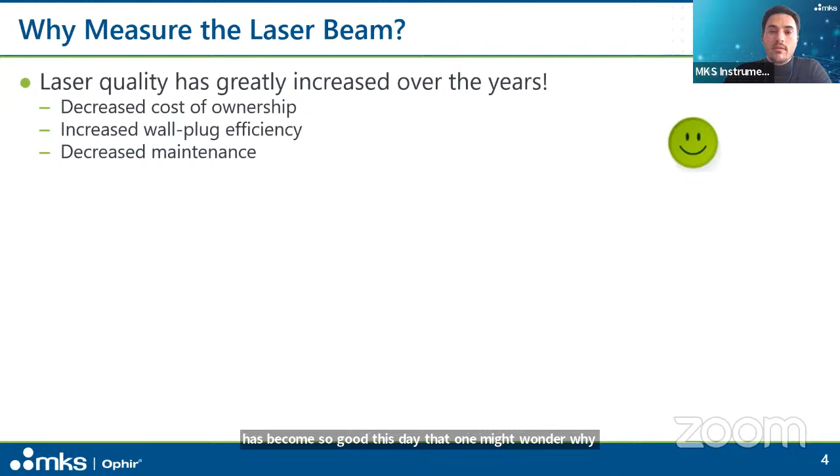So the very first question is, why should we measure laser in the first place? The quality of lasers has become so good these days that one might wonder why it is necessary to control them at all. But they are still made of physical matter, which means that any laser is only as good as its beam delivery system—components wear out and get dirty over time, and as a result performance suffers. We have power decreases, focus size will vary, and focus position will change. In the end, time is wasted, scrap is produced, and money is lost.

There is a direct link between the quality of the laser and the cost of the produced part, linking it to the title of the presentation—reducing the price per weld. First of all, a good laser will increase quality, with lower risk of reject, higher reproducibility, greater traceability, and better documentation.

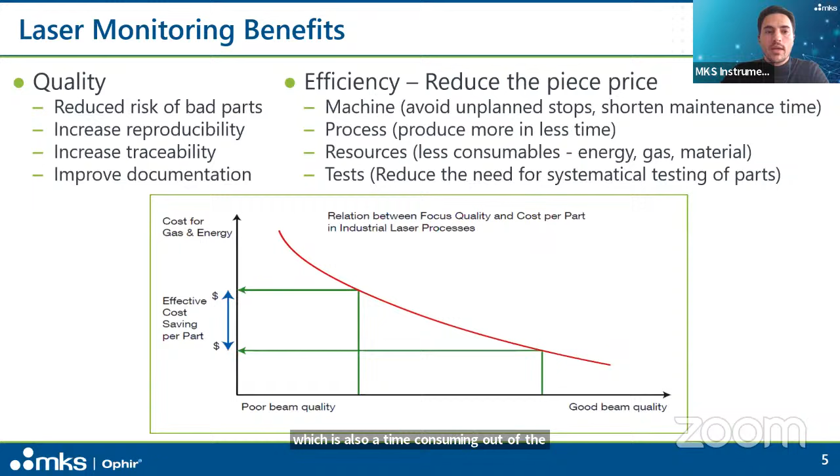But efficiency will also increase. Breakdowns are avoided, or you can predict your maintenance and reduce maintenance time. You can produce more in less time. You will consume less energy, less gas, less material, and finally spend less time on testing, which is also a time-consuming part of the process. If you know that your process is right from the laser point of view, you can reduce the testing.

There are a whole variety of laser parameters that can be controlled, but it's primarily about the process. Which process parameter is the most important? The power density at the workpiece, the power per area. These are the two main components, the power and the beam area, that we address with the measurement technology. The power density can be affected by degradation of laser components, and if the power degrades over time, the power density also automatically decreases.

Let's see different power measurement solutions we have to check the power. There are many types of power sensor. The first do not require any active cooling, they are passively cooled, and come in different shapes and sizes depending on the power to be measured and the interface used. Then there are air or water-cooled ones, which allow you to measure more power or for longer duration. Among these families, there are portable standalone solutions you can operate with battery, needing no separate device, or solutions designed to be integrated on production lines to run 24/7, communicating with Profinet or whatever. The power variation was the easy part, so to say.

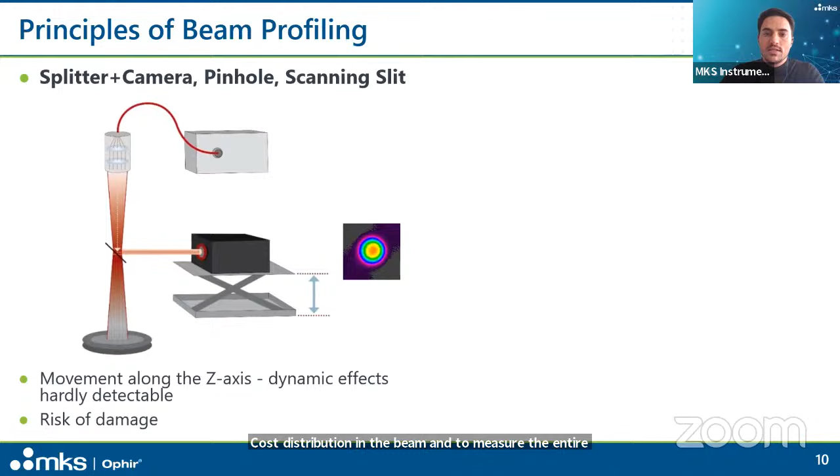So to measure this parameter, we use what is called beam diagnostic or beam profiling. There are two approaches. The first option is a beam splitter and camera system, or a slit-based or pinhole system, which captures individual cross-sections of the beam. Since the laser must be in contact with the instrument, the laser power is limited, otherwise you will damage the measurement instrument. So it provides a detailed profile of the power distribution in the beam. To measure the entire beam caustic, the measurement system must be moved along the z-axis and multiple cross-sections measured. This takes time, so dynamic effects such as focus shift are not detectable.

The second option is a camera that captures the Rayleigh scattering of the laser beam from the side. In this case, we're not shooting the laser onto the detector; the detector is looking at the laser from the side, and we call it beam watch. It is a non-contact measurement, so there is no upper power limit, you cannot damage anything. The whole beam caustic is captured at once and can be followed live, so all parameters can be measured immediately in real time, and you can track the focus shift.

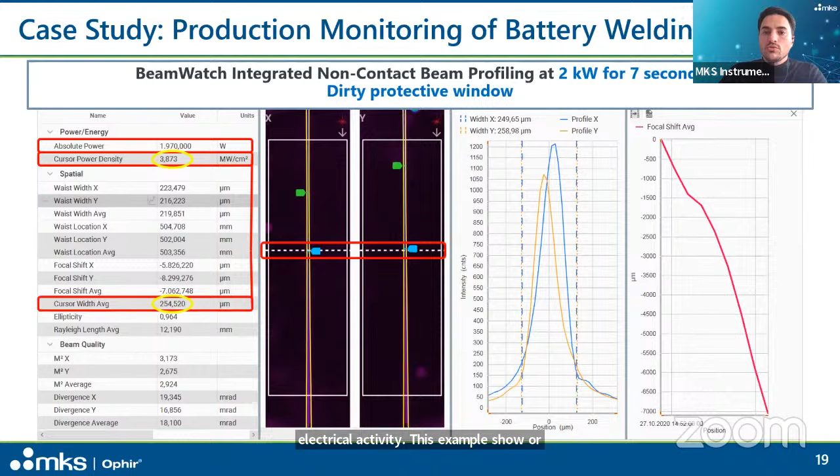So this example shows how predictively monitoring the focus shift allows us to detect the defect before it appears.

BeamWatch integrated measures the laser after each produced part. The measurement takes only a few seconds and is performed during loading and unloading of the part, so it is cycle-time neutral. It's not taking production time.

Each time, a pass-fail output is generated, so you can define the parameters for the pass-fail, and then you have an okay, not okay, and a detailed report is archived.

And finally, the ability to recognize a trend is used for predictive maintenance, and the protective window is cleaned or replaced before producing bad parts.

What you see here is like a chainsaw, or the blade of a saw, these green dots. Every time the protective glass was replaced, you can see that the focus shift goes back down. When it's going up, that means it's getting worse, smaller focus quality. Then with time, it grows as the protective glass gets dirty, and then every time it's changed. The limit here was fixed at 3 millimeters as an acceptable value, and every time it was approaching 3 millimeters, it was changed.

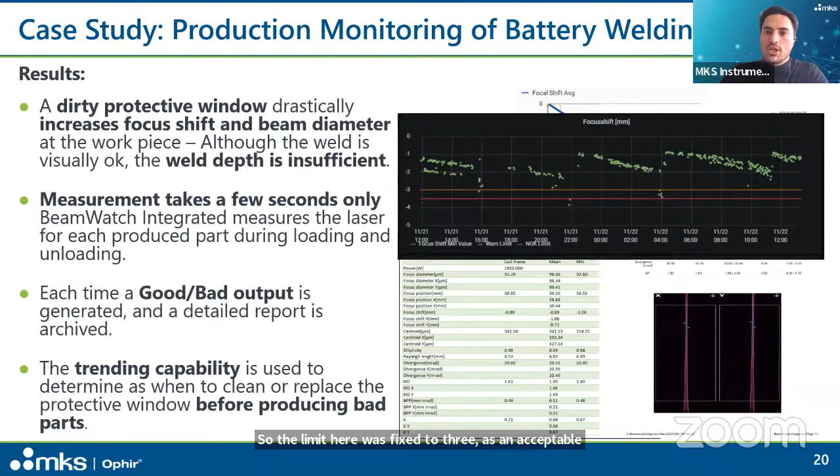So as a conclusion, we have seen that it is very important to know and maintain the laser parameters. We have also seen that there are specialized measurement solutions that can be used to quickly measure the most critical parameters, especially dynamic parameters such as the focus shift. And finally, we believe that the more regularly the machines are checked, the higher the quality and the productivity, which will help you reduce the price per weld.

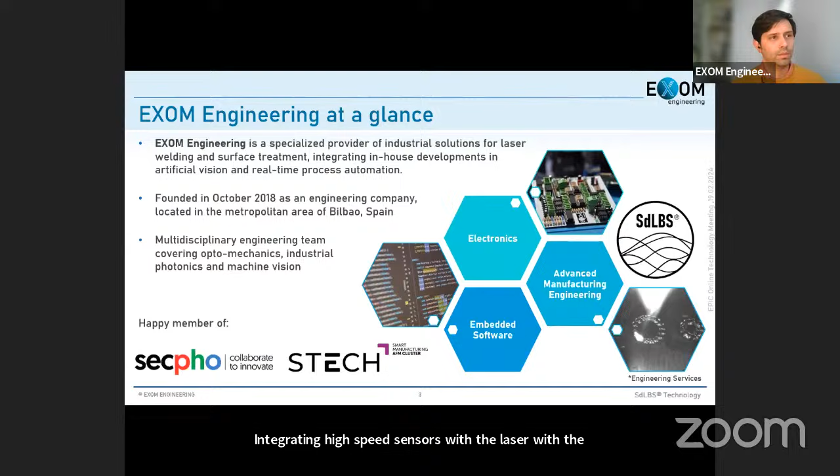As I said before, we found EXOM Engineering already 5 years ago. It was an interesting approach for us because we were dealing before, in other companies, with integrating sensors and always having some kind of issues and challenges integrating high-speed sensors with the laser, with the machine. And we said we would like to make it a little bit different. We would like to have a solution so that we are dealing with these three worlds together.

So electronics, we develop our own electronics at EXOM Engineering. We develop the embedded software that is running on these electronics, and we apply this mainly to laser applications, but not only. Right now we've been developing from this initial status of control electronics to optics, and we're going into a bigger application area where we're offering complete solutions for laser welding.

So for those of you not familiar with wobble laser welding, how does this work? Basically, we just move the beam on the surface using mirrors. In many cases we use two mirrors, but there's also a case where we use one mirror to move it in both directions. So we are somehow wobbling - the word itself is like going from one side to the other, making different geometries.

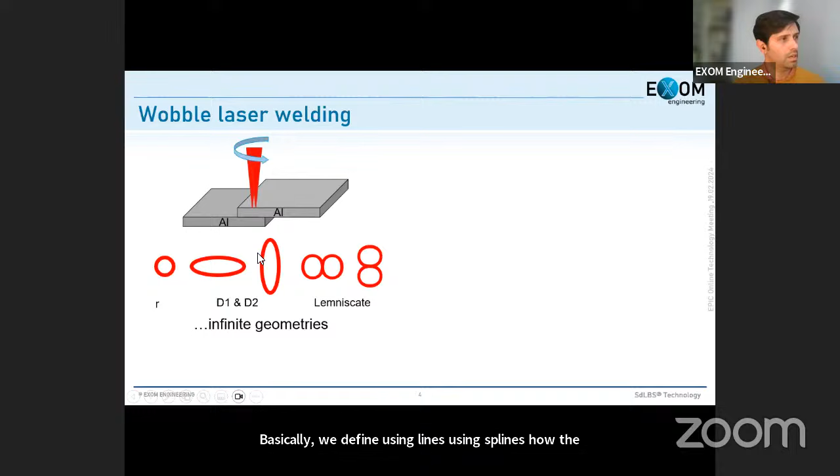These geometries are usually described as a circle. Circles are the most used wobble technology or wobble strategy. But we can also do ellipses, lemniscates, and basically infinite geometries. We define, using lines and splines, how the laser is going to move, and at the end we have a wobble strategy. How does this look on the surface?

This is an example of a conduction welding application using aluminum. Basically what we do here is an ellipse, with a frequency higher than 200 hertz. What we try to do is move really fast so that we're reducing the dynamic at the same point.

So we're just moving and moving around this area, so that at the end it's important to define the wobble type we're going to use for the technology and application. But not only the wobble type - it's also important to keep an eye on the frequency, how fast we're repeating this movement on the surface. And one interesting approach we're following is the energy, which is the power times the time that we stay at the same point.

So it's not only possible to change the figure of how we are wobbling, but we can also change the different speeds and powers at different segments over this figure.

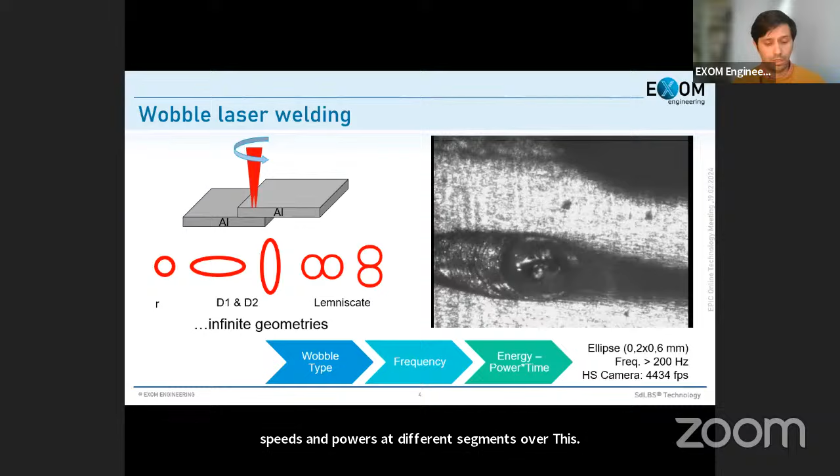As I said before, I brought today just an application case, just as motivation. Basically, if you're familiar with laser welding or welding T-joints, you have a really good definition of the deep penetration throat, how deep you need to go into the material, but also the nominal throat thickness. This is just an example - I put some numbers on the picture so we have an example of how we define this, or how our customers define it. This is work we've been doing together with the company Alpha Laser.

Basically, if we go to an application where we don't use a wobble, let's say we're going to try to weld these two metal sheets - this is an inox material. If we have the right amount of energy, the right laser power, exactly the right diameter, focal length, and so on, we're going to go deep enough, but we're not going to have exactly the throat geometry our customers are asking about. So this is just an example of how wobbling could be an enabler for future applications in structural welding.

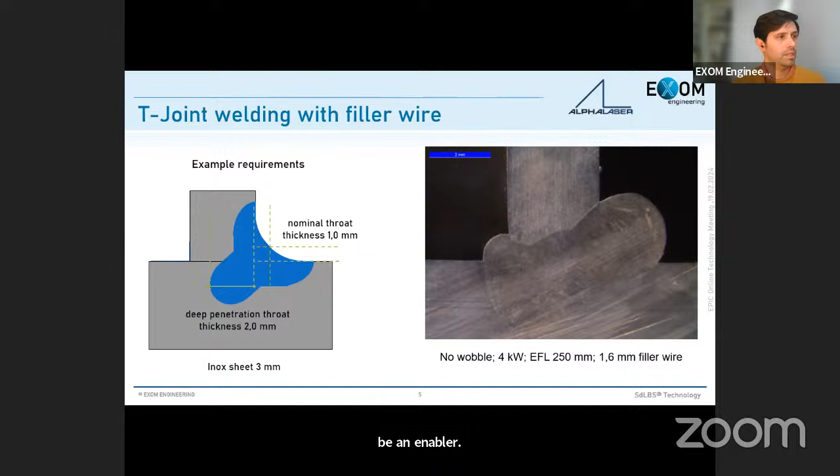Before we start doing this, we of course analyze using cameras. This is just a video of how we use a wobble strategy - this is a lemniscate, the most typical strategy in these cases. We just wobble, and once we wobble, we take further steps and analyze how deep, which kind of laser power we need, the width, and so on, and how we don't affect the surrounding areas of the T-joint, so that at the end we're able to have an acceptable deep penetration, an acceptable throat geometry, and also an acceptable distance over the surface.

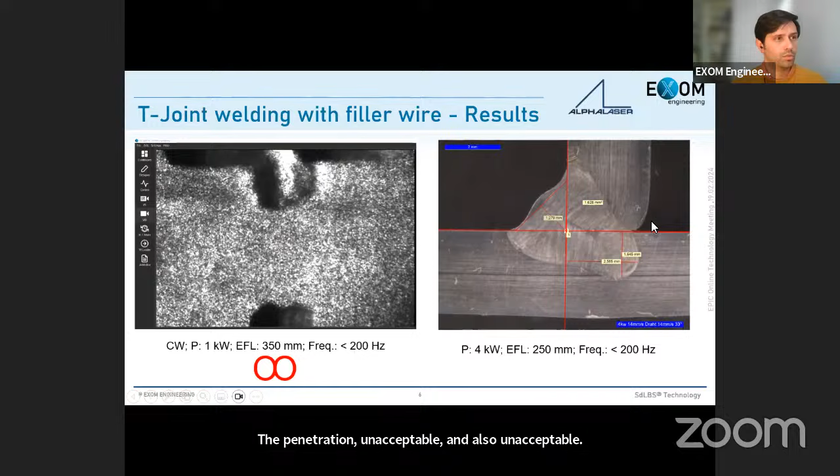So let's think about this - of course it's going to vary depending on which angle we're welding at. This is a welding strategy done with a robotic arm, so it's also important to have access. But basically what we see here is a well-defined laser weld joint, so we can say this is working well. But it's important to understand that the stability of this result depends, as I said before, not only on the frequency, but also on keeping this wobble strategy along the path, and keeping the position relative to the filler wire exactly at the position we had at the beginning.

Also related to the presentation before, this position, how deep and the effective focal length is here. If we extrapolate to the X and Y position of the laser beam, it is important as well to keep this position. So in our laboratory setup, we have integrated two cameras.

As I said before, basically we use in this setup two mirrors, a galvo scanning mirror, or two galvo scanning mirrors, and we're integrating a thermal camera in the upper part. So when we have the reflection of the energy, the thermal image is going back to the camera. We see on axis, sharing the same path of the laser beam and the thermal camera, and we do it as well for the visual camera.

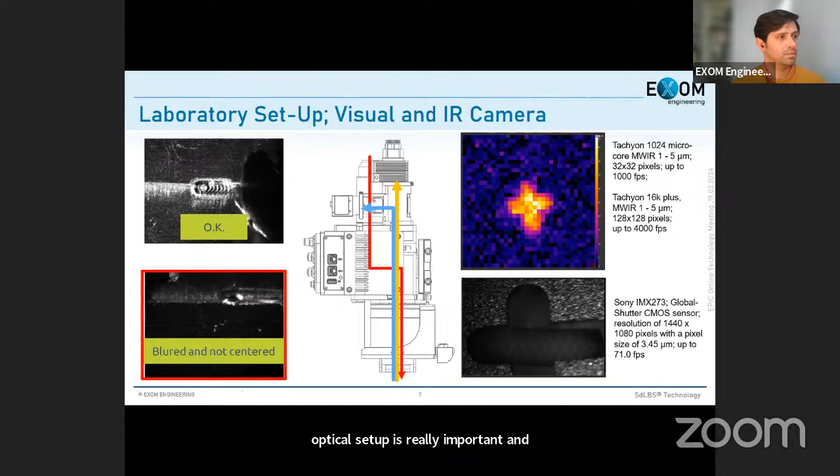One of the challenges that we had before during this integration is how the cameras are centered, how the different wavelengths, how the different lens and so on are giving us an image that is really okay for doing this analysis. So it's not only important to have the possibility to process all this information, but the optical setup is really important and is decisive for having a good monitoring solution.

So this is another work we did, also in a project together with the Research Institute LORTEK, in which we said we would like to be able to identify 5 kinds of wobbles using convolutional neural networks, using deep learning technologies, which are state of the art right now.

Because we're able to integrate cameras, we would like to identify how these different wobbles are performing on the surface. So we defined 5 of them: a small circle with a diameter of 0.5 millimeter, a bigger circle with a diameter of 1 millimeter, an ellipse in one direction, and the same but 90 degrees to the direction of the machine speed, and then the well-known lemniscate or infinite strategy.

In this case, it's important to understand that we're not using exactly the same amount of power for all of them, but we are using exactly the same feed rate, and we're trying to keep as well the frequency for all of them.

So I would like to share some of the results. The monitoring approach in this case was done using YOLO v8. We took the images, identified the images, labeled the images. At the end there were more than 1,000 images, and then we tried to understand if the system is able to identify them, with the right amount, with the right optical setup, because we need to have external illumination and filtering.

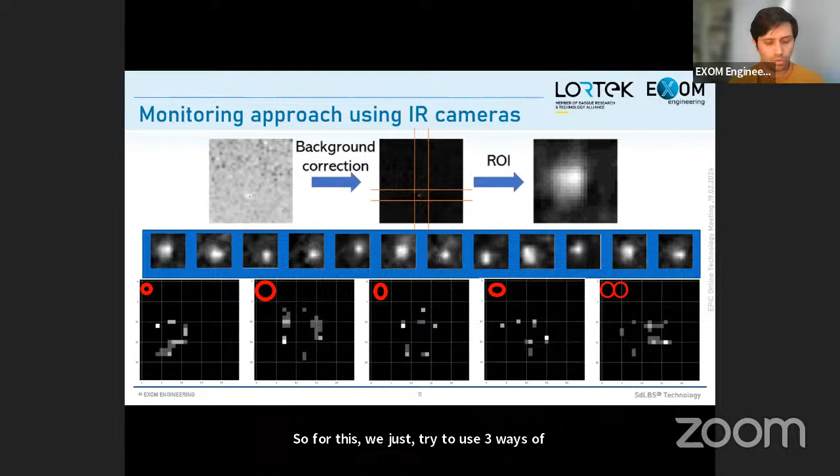So for this, we tried 3 ways of using deep neural networks. In this case, I present the comparison of 3 results. Basically, in these 3 approaches, we use a convolutional 2D network.

But we said no, we would like to go even to a better result, and in this case we went to the second approach and the third approach. Here we're using convolutional long short-term memories in 2D.

Basically, we're introducing in both of them not only the spatial resolution but also the temporal resolution, so that the system takes into account the image before. It's more or less similar to the first approach, but here we're making an image from the stack of images, taking every picture or frame as it comes from the camera.

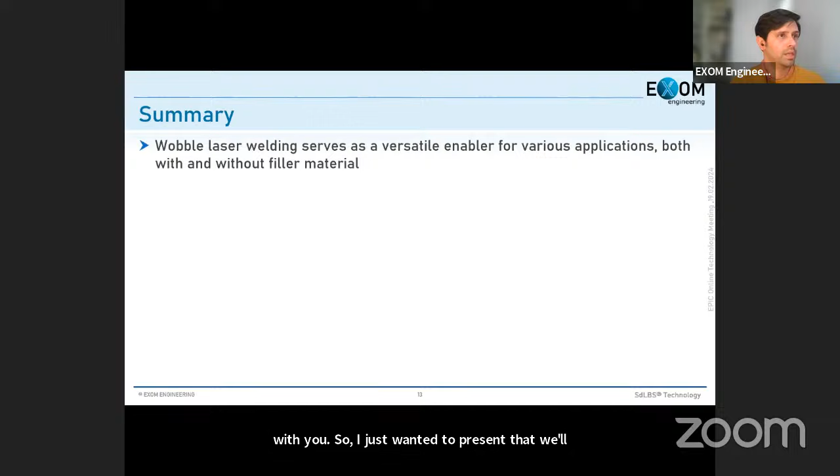So this was my presentation, what I wanted to share with you. I wanted to present that wobble laser welding serves as an enabler for various applications using filler material, and also without using filler material. For us, it's really important to keep the constancy of the wobble beam—not only thinking about how powerful the laser is and whether we are at the focal point, but also whether we are doing exactly the strategy we defined.

As I said before, using visual cameras requires a little bit more extra setup, illumination, and filtering. But in our eyes, it really represents a solution compared to more complex sensor integrations. Of course, if we can use both, seeing in different wavelengths, that's really positive. For us, the most robust application is using infrared cameras, because we have a higher dynamic range and a high-speed solution up to 4,000 frames per second, which is really positive in our eyes.

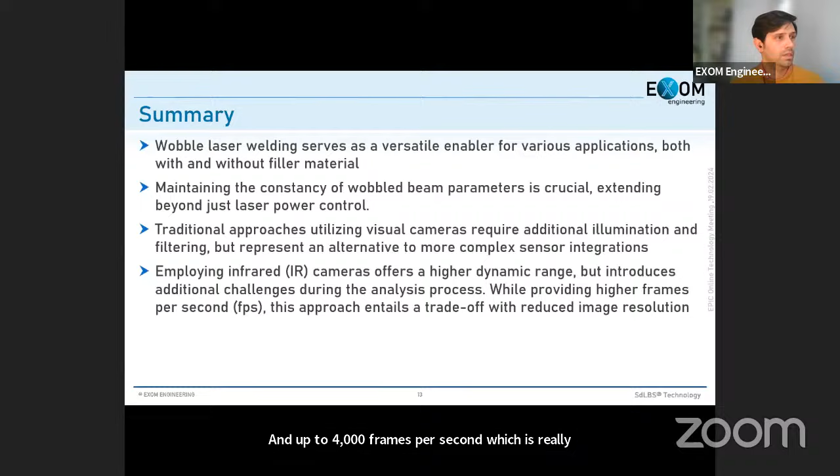I can start with a question about the power you use in the different shapes of the wobble, because at the end one circle is small, the other is slightly bigger. In the infinity, you pass a couple of times for the same area, and I see that the powers are more or less the same, slightly different. Will it make sense to evaluate different powers, or are the powers you choose optimized for these shapes?

Exactly. So the power that we use is for welding results that should be working well. We just did the preliminary identification of the parameters, and we came to the conclusion that this power is exactly the necessary power for welding both sheets. In the case of the aluminum sheet, exactly.

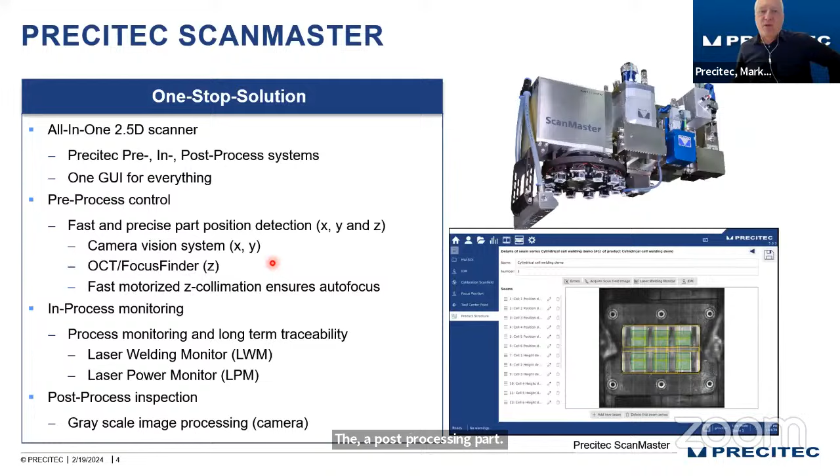So this, what we call a one-stop solution, is an all-in-one 2.5D scanner. You will see later on why it's called 2.5D. It comprises all Precitec sensor technology for pre, in, and post-processing. We try to compress all the user interfaces into one graphical surface, so from that GUI you can control the camera, you can control the OCT part, you can control the LWM part, and you can also control the post-processing part.

So why do we call that a one-stop solution, or why does it comprise a lot of Precitec knowledge? We are using an industrial scanner, which is not a Precitec scanner. We are not famous for scanners.

That's why we are using one of the most robust scanner technologies on the market. But we are famous for laser cutting.

And so one part of the Scan Master is the upper part of the Precitec ProCutter, which is the motorized collimator. So this is the 0.5, so the half D, which we can put on top of the 2D scanner. So that's why it's 2.5D.

So we are able to move the collimation lens, and that's why we are able to correct the focus spot position in Z. A lot of knowledge of the Weld Master is in the Scan Master, which is mostly also the knowledge on coating.

So as you may know, all the sensor technologies need a special window, a spectral window, to perform best. And this is a question of coating, and that's why we also have good contacts to famous coating companies all over Europe, which can supply us the best windows and the best beam splitters in order to have the best performance on all the sensors.

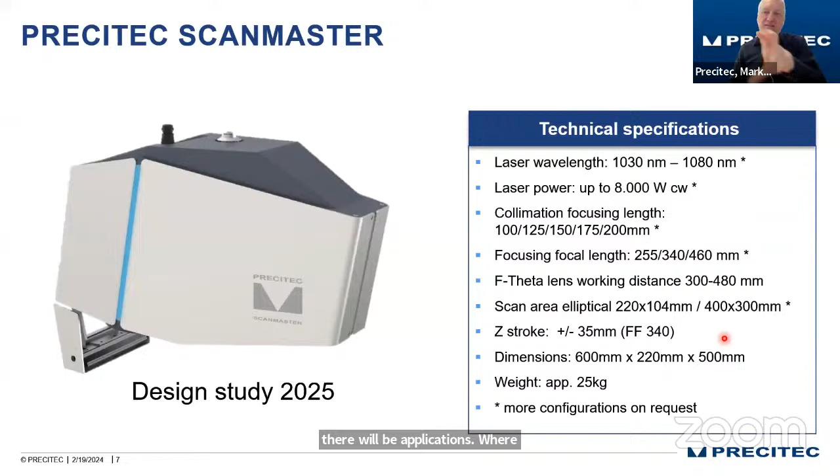Different focusing, different collimation lens, different F-theta lenses, whatever will be important for the process. The Z stroke here is the one which we can guarantee with the motorized collimator. You see the dimensions and the weights, and for sure there will be applications where these numbers will not fit, and we will have different configurations on a request.

But what is of main importance these days is that we are also able to apply beam shaping. And that's why we are partnering with Cailabs. You may have seen that on the Photonics West and on LinkedIn, parallel to Photonics West.

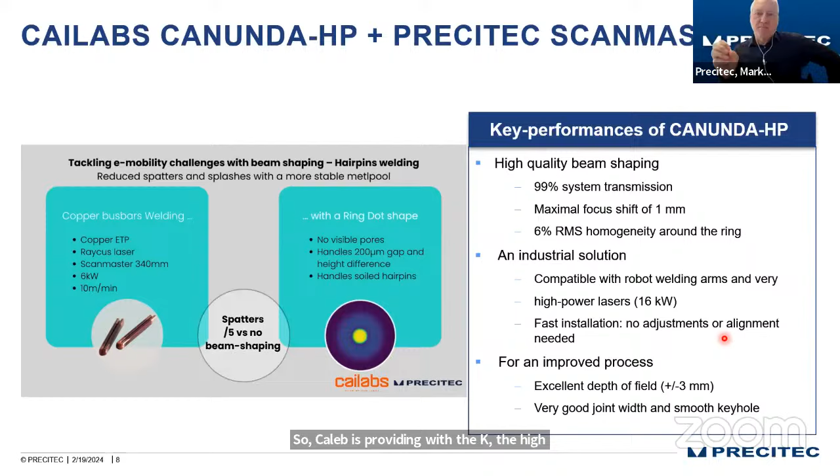So Cailabs is providing with the Canunda high power system a very high quality beam shaping solution, 99% system transmission, because it's based on reflective optics.

We benefit on the really less focus shift, on the high quality of the focus of the beam shape. That's why in all the work we have done in the past, in the last 2 years on industrial level, and before that on R&D level.

in European projects, we have seen that it's a fully industrial solution going up to 16 kilowatts, which is important for us when it comes to extreme high power applications. And one of the best things of that solution is the excellent depth of field, which we haven't seen with other solutions these days.

So let's go to one of the applications where we apply the Scan Master, which is a cell contacting application, one of the famous applications in e-mobility. There are some limitations in that process which we have to cover, and we can apply all the sensor parts.

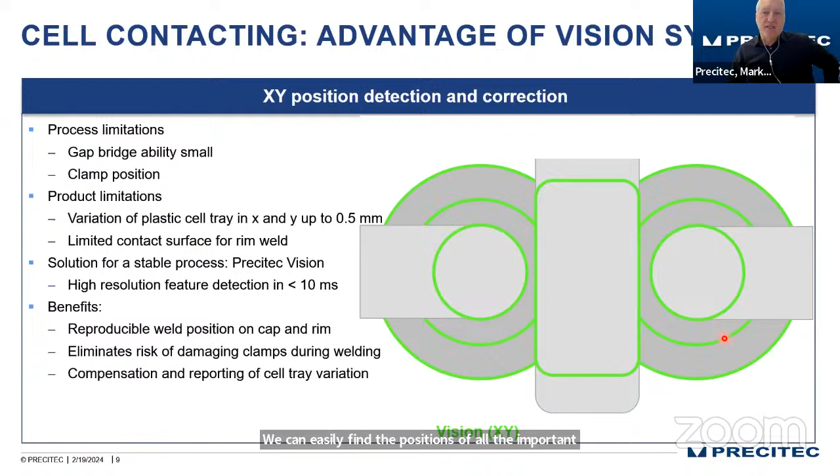Based on that information, we can directly set the regions where the weld needs to happen. We can apply the weld. We can measure with the autofocus, with the OCT, set the position, apply the right focus point, and then perform the weld. So this is all based on an excellent weld using all the sensor technology, which is important.

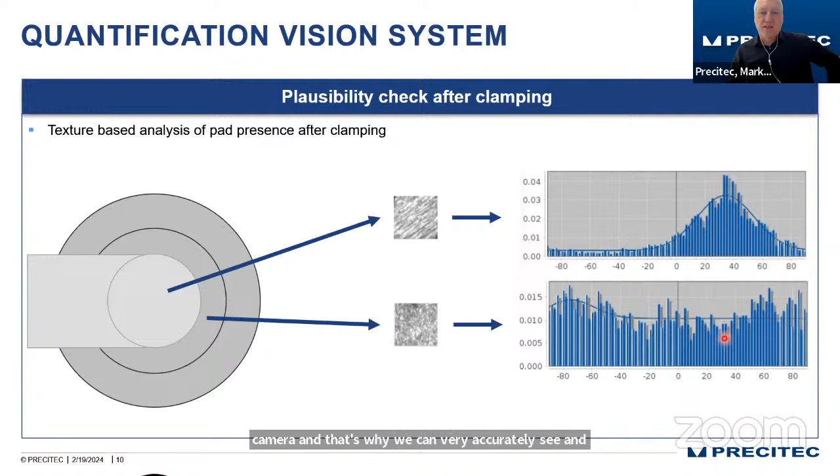Just for your information, the vision system that sees the positions of the cover part and the weld part is based on texture-based analysis. Typically the parts are made of different materials, or the material is differently structured, and this is what we see with our camera, so we can very accurately distinguish different materials. For sure there are some gray zones.

Typically it's not always 100% aligned, the cover part with respect to, in that case, the cylindrical cell. So if it's completely out of range, we can easily stop the process or not perform the weld, and just bring that information to the customer that there is something wrong with the clamping or with the position of the contact, which can be corrected afterwards.

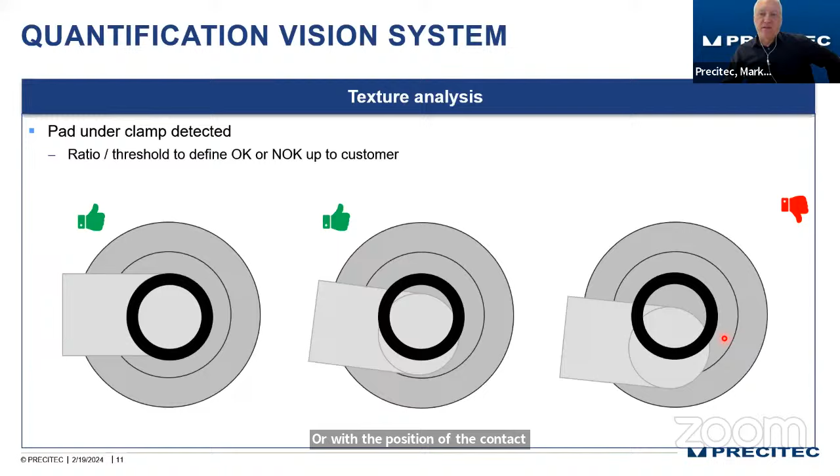So let's talk about the Z position. Even though the Canunda system is providing excellent Z-focus constants over plus or minus 3 millimeters...

And this is quite easy with the OCT in the Scan Master. You see that, for example, for the mechanical strength and the electrical conductivity, the usable focus range is different than for the weld depth and the intermetallics.

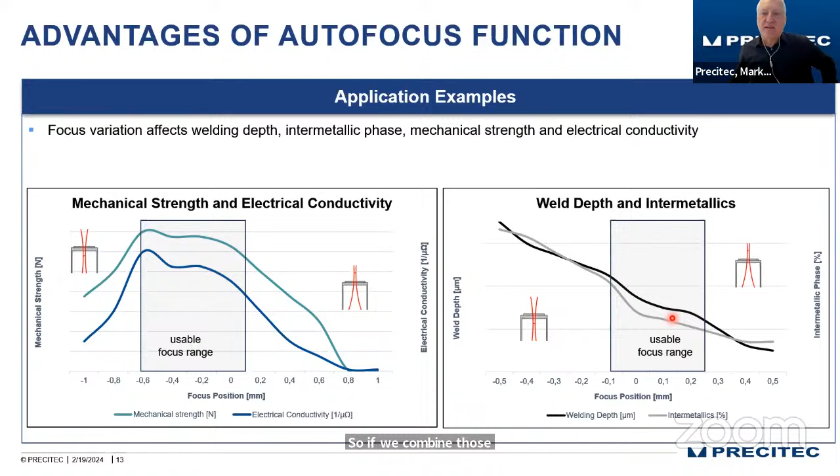So if we combine those two regions, the residual usable focal range shrinks dramatically. We only have plus minus 0.1 millimeter of residual focus length.

I have to admit these cross sections and these welds haven't been performed yet with the Canunda from Cailabs. We will do that, and we will provide a new slide in the near future on these specific applications with the new beam shaping solution.

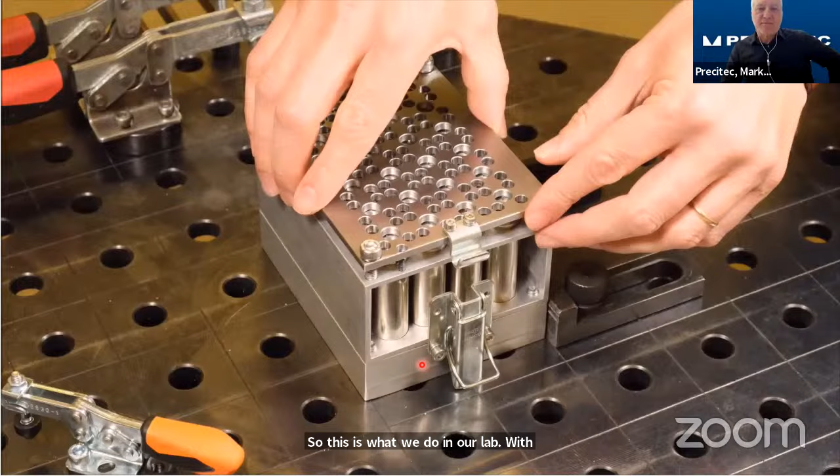This here is just a video, I hope it will start, on the typical application I was talking about. This is what we do in our lab with just a very basic clamping tool. I will turn down the music a little bit.

So you see, we actually have worked with beam shaping before with the AFX laser from nLight, but now we have seen that with the Canunda it's definitely a better solution.

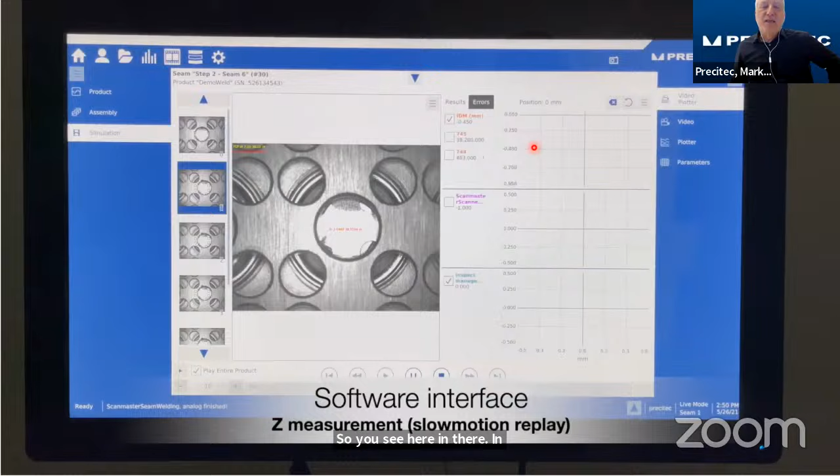You see here, in the pre-process we do the measurement of the positions, then we apply the welds. We have seen the positions, we have seen the Z position, we can correct the Z position with the autofocus. We have process monitoring in process, the LWM, where we track temperature, back reflection, and laser power. And in the post-process, we can see that again.

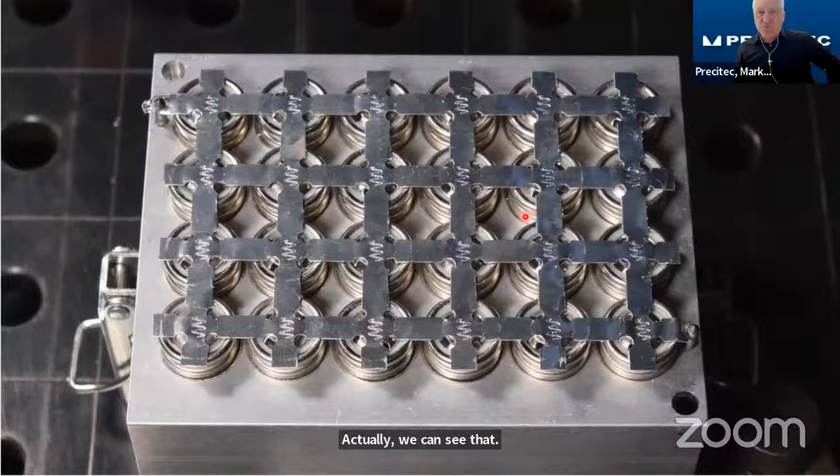So that was more or less my contribution to the EPIC meeting today. One additional remark, we also work on AI applications. The time wasn't enough today to talk about that topic.

We are quite strong in AI applications based on photodiode measurements, and we can now provide information on mechanical strength as well as conductivity, all based on photodiode measurements.

And this is hopefully what you take home: we see a high diversity of laser concepts, and we see a lot of challenges in industry, which makes us able to provide flexible and application-specific solutions.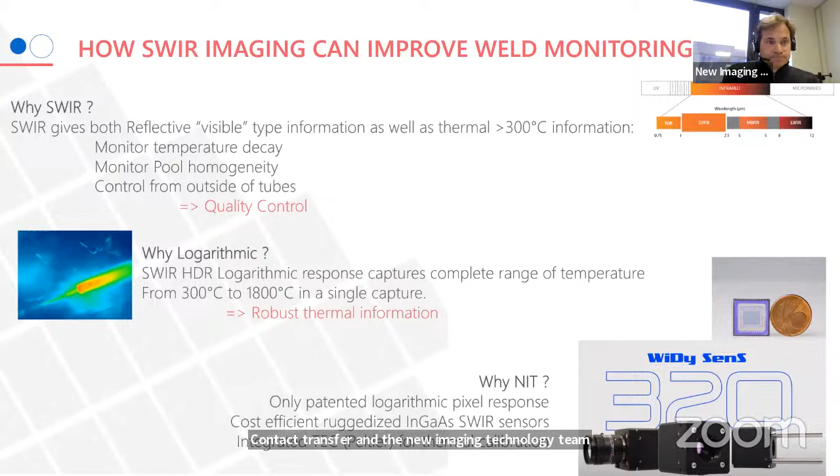Yes, it's again process monitoring. I hope you can see my slides right now. Yeah, we can do it. This is a very interesting topic, which is why we have a lot of partners and members doing these kinds of technologies. It's very important, especially with new products such as electric vehicles, we need a lot of process monitoring. So probably that's one issue.

My name is Søren Hollatz. I'm working for 4D Photonics. It's a small company located in Germany, with more than 20 years of experience in process monitoring. Last year we announced our new product.

And I will give some short introduction to the sensor system and also some results from hairpin welding. So I'll start with the technology by itself.

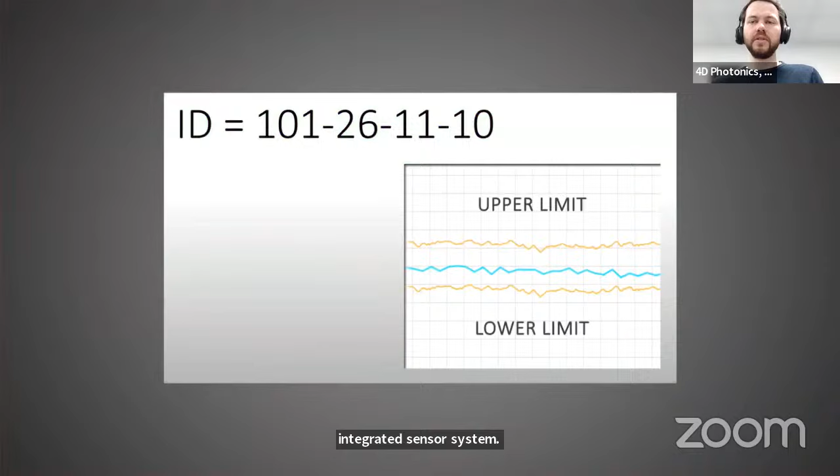It's a photodiode-based sensor system. So we have some light emission from our process that is going back to our laser head, going into our coaxially integrated sensor system. And then we can evaluate the signal on reference base. So we are doing some good welds and say, okay, there's one that shows a little different signal, and then we can say it's not okay because something has happened there. That's basically how process monitoring with photodiodes works.

Our main goals are to increase the accuracy during this monitoring process, because the pseudo faults are in both cases very, very painful, and that is our most important goal, to increase this accuracy.

The second goal, especially for this sensor, is not just to say this weld was not okay. We would also like to say why it was not okay. So we would like to classify the fault, to give some ideas for the production line. Oh, my clamping device is not working correctly. We had a gap between our parts, or our optics has some contamination.

And for this purpose, we have designed a new sensor system. You can see it in the picture, and let me...

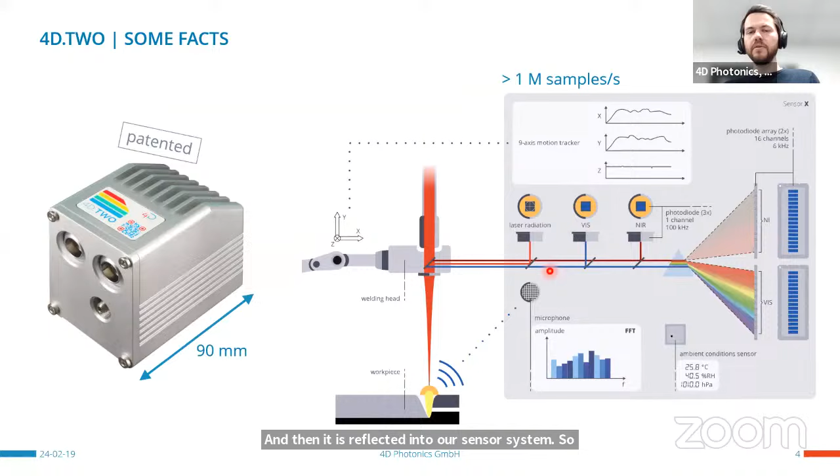We can see here the welding process with the light emission that is going back into our laser head, and then it is reflected into our sensor system. There we have the first sensor, first photodiode for the laser radiation wavelength. In this case, it's about 1 micrometer.

We have another photodiode that is detecting the visible light, and also one for the near infrared wavelengths. And the last two channels are additionally split into its spectral components. So we have another array of sensors or photodiodes for the near infrared light, and also one for the visible light. So we have 16 channels each.

And with this further data, we are able to have more accurate monitoring compared to our old product, and hopefully also compared to the competitors that usually go with 2 or 3 photodiode sensors.

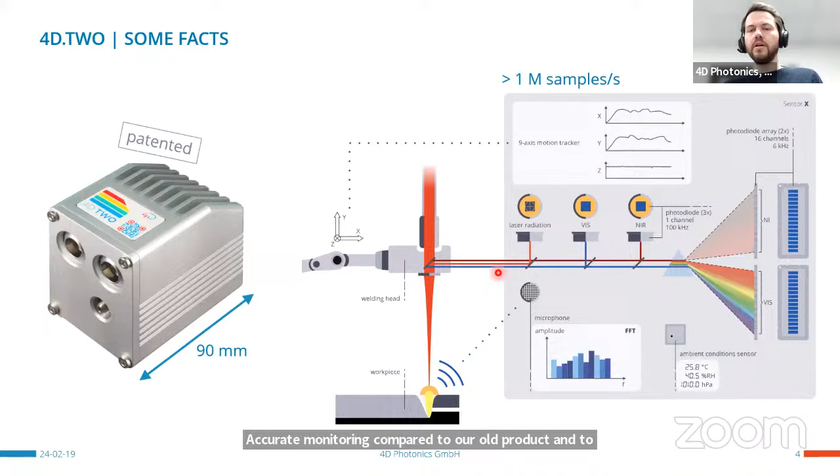So what's the benefit? I already said we have a lot of channels that we can use for the analysis, but we have also developed this sensor in this way that we are able to use it for a wide range of applications that have some process emission. Because the idea is to have one sensor, one hardware sensor for all applications, and to just do some software adaptation due to the process or material or wherever you have.

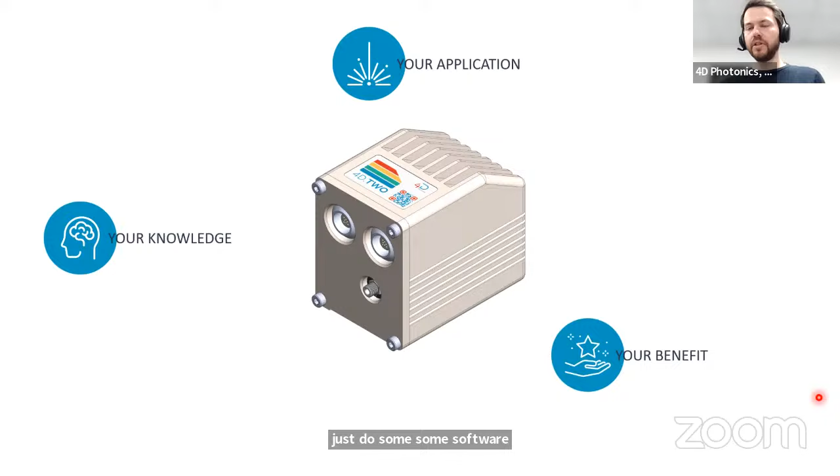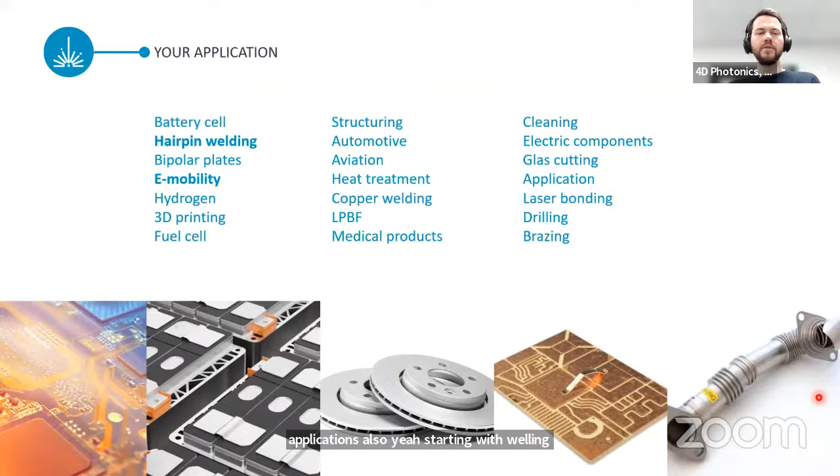So we have tried a lot of different applications, starting with welding applications for battery cell welding, hairpin welding—which I will show afterwards some results—also bipolar plates or other welding tasks. But we've also used this sensor for laser powder bed fusion, drilling, structuring, or cleaning processes. And we are right now getting some experiences in all kinds of markets that are suitable for our sensor system.

So our idea is to classify the faults, and for that I've already shown you that we have a couple of different signals available in our sensor. So what are we going to do with these lots of channels? How do we proceed with this one?

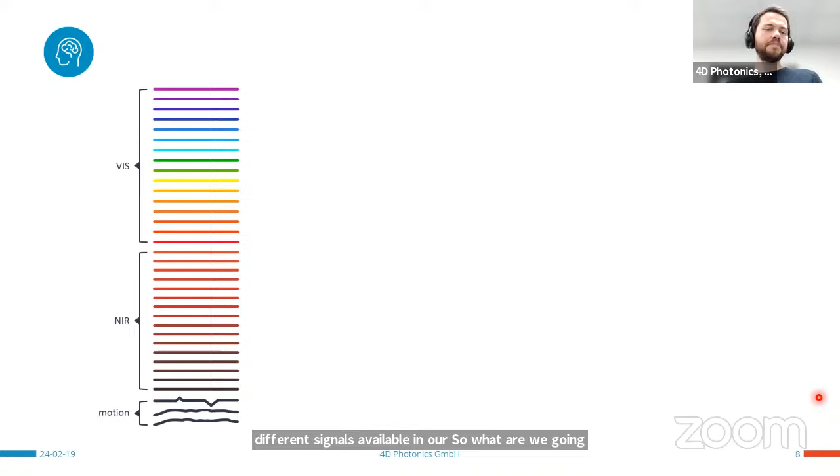Therefore, we are going to use a combination of channels. So we have the function in our electronics that we can combine a couple of these channels to create a new channel for the analysis, which is behaving in a special manner, for example for gaps or for spatters or for temperatures. And with this one, we are trying to get some more information, and also for the identification, to get some specific channels for the identification.

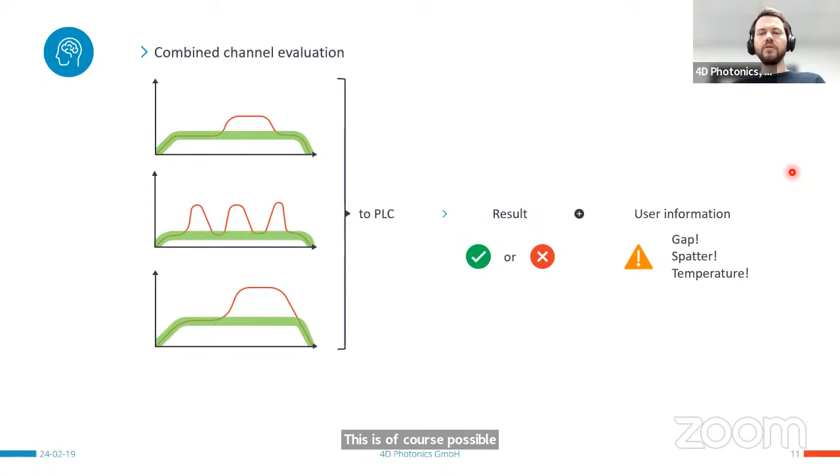We are basically getting a lot of data, and then we are correlating it with some scatter bands and say, okay, there's some outlier, and something must have happened during this weld seam. This is of course possible to communicate to the machine, to the logical control, and to say there was some kind of error.

And by having this specific classification of the faults, you're able to also have an adapted maintenance action. So you can say how you proceed with spatters—maybe you can tolerate them and have just some further check if it's okay, or you can directly send it to scrap when you have a gap between your parts, which will definitely have a huge influence on your quality.

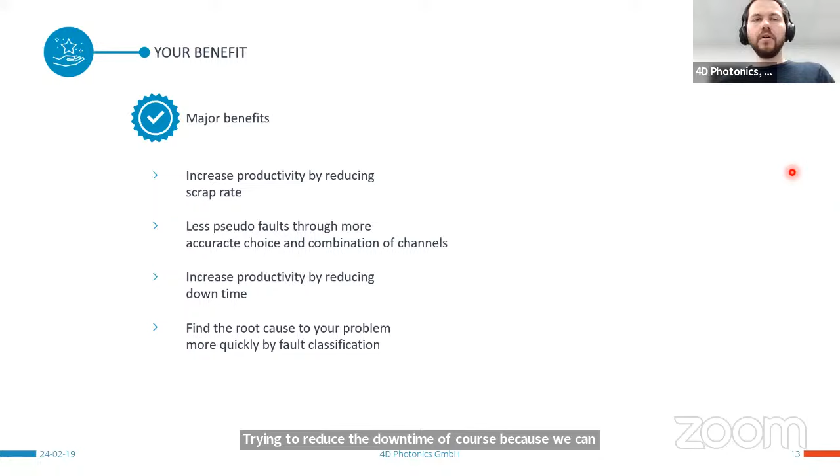So with this, we have a list with a couple of benefits that I probably also told you in the last few minutes. We're trying to reduce the scrap rate, of course. I've talked about the pseudo faults. We're trying to reduce the downtime, because we can faster determine the root cause of our NOK product. And also we can have a specific maintenance call at the end.

So that's it about the basics. Now I would like to talk about some results.

In this case, in hairpin welding. The newest generation of electric engines for electric vehicles are built using hairpin technology. So instead of winding a wire for the stator, you are stacking these copper pins into a certain frame, and you weld these frames on one end.

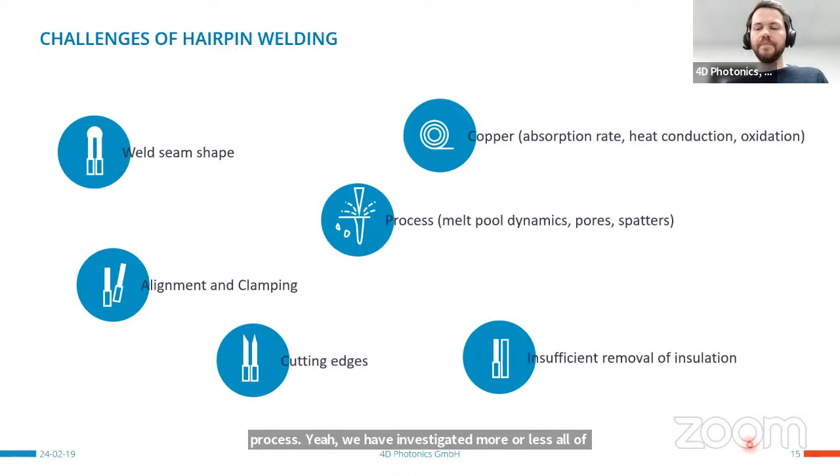So there are a lot of challenges during this welding process. We have investigated more or less all of these, but I will just give some shorter results, starting with a good hairpin welding example right now.

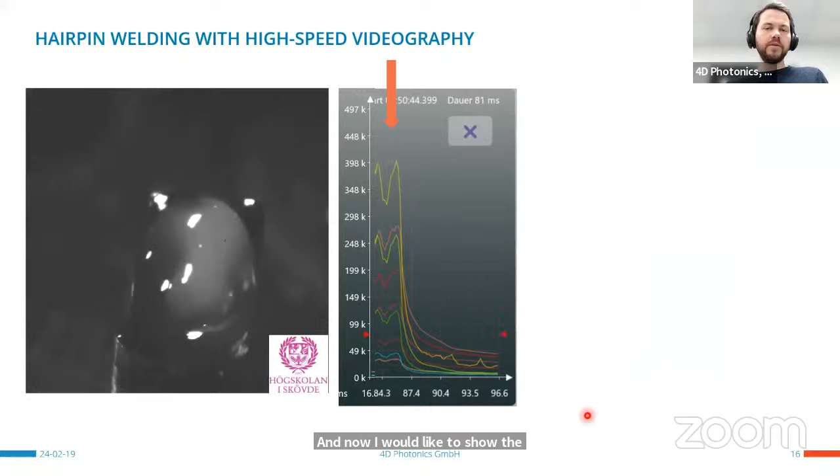Now I would like to show maybe the opposite of this process. When we have some insulation on this pin that has to be removed before welding, you can see that the signals are escalating completely, and the process is not stable at all. This is something you can see pretty easily.

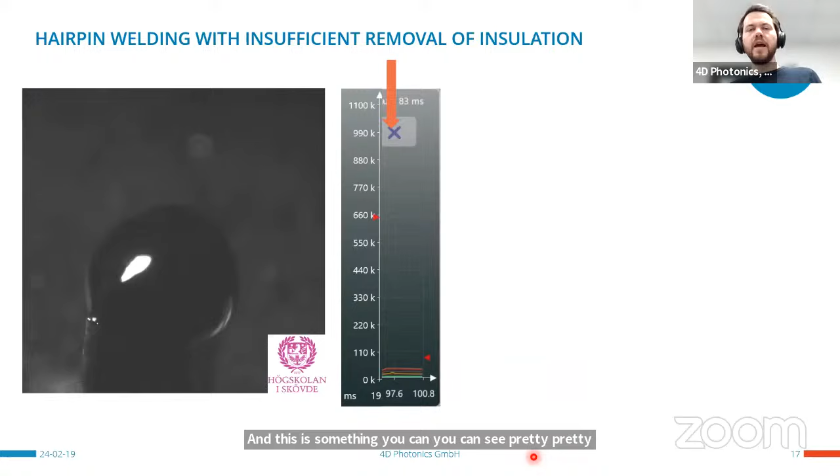But there are also more complex faults or happenings during the welding that are visible in our data. To investigate this, we have performed welding experiments with the Fraunhofer ILT.

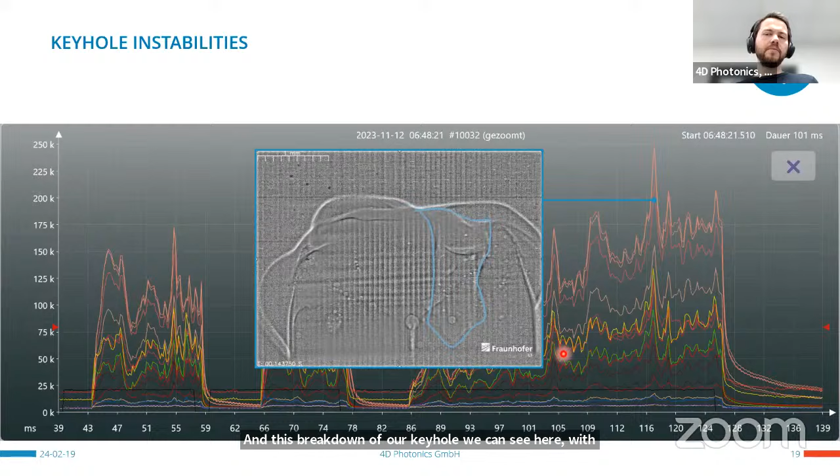And if I move some slides forward, we can see it is moving on the other side, but we've lost the depth completely. This breakdown of our keyhole we can see here with this very high peak. One slide afterwards, we are getting back this peak, the depth of the keyhole. So these are things we are investigating with this data.

We can also see the positioning was not really good on this side, so the keyhole is bent, and we probably didn't hit the hairpin in the middle, but on this side.

Another thing we can do with the sensor is look at the near infrared channels. I have excluded 2 of them right now that we can see in the graph. And what we can see is that they have a different gradient at the end.

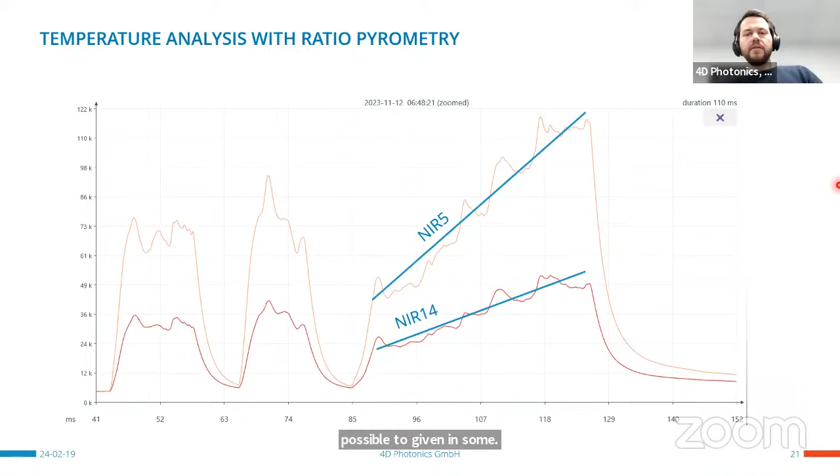With this gradient, it is possible to give some ideas, information about the temperature, because we can build the gradient, the quotient, and then we have kind of a ratio pyrometer. And this ratio, when it's increasing or decreasing, gives us some information about the temperature.

That is, in this case, rising due to the last step of the welding process. It is basically possible to get also a real absolute temperature, but in this case, this optical setup is not calibrated, so we just can give some relative ideas that we have an increasing edge here. So this is one example for this combination of channels that we are aiming for.

And I have also a slide for what we can do with this data with X-ray imaging.

What we really like to do is skip this X-ray imaging and just have our data from our sensor, and be able to say at this position these kinds of mistakes happen.

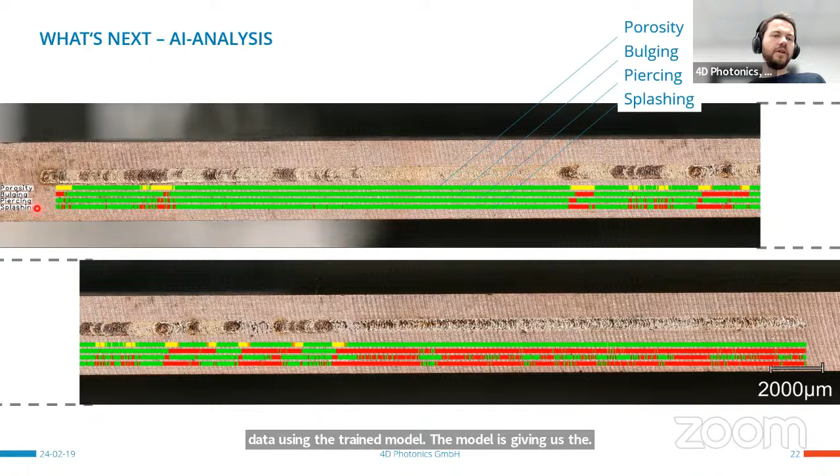So what we are doing right now is using artificial intelligence, having four different categories of errors. We've trained this model with our data and also the X-ray videos. This slide shows the result when we just use our data with the trained model. The model gives us the positions where there's a higher probability of these four categories: porosity, bulging, piercing, and splashing.

We can see that it fits very well with the rough surface structure of the weld seam. Here everything is green, and the weld seam looks pretty good. Then we have a couple of mistakes in the surface, and we can see that our signals and the trained model show these results. So these are the things we are doing right now.

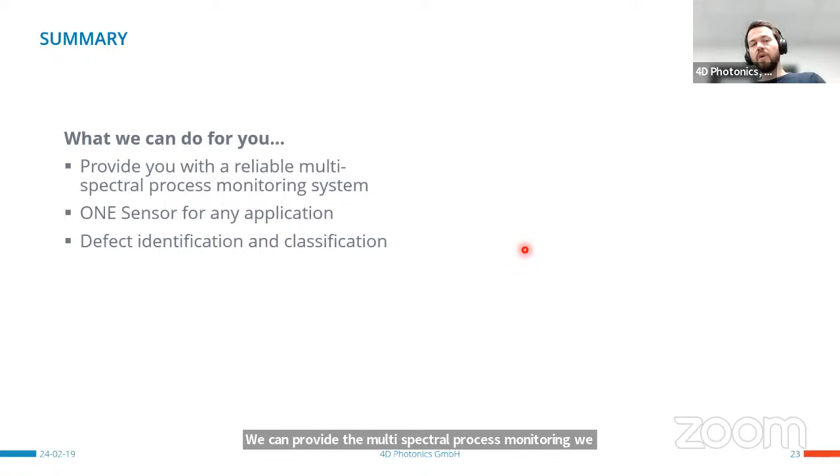So in summary, you've seen what we can do. We can provide multispectral process monitoring. We are trying to have one hardware sensor for more or less any application that has some light emission. We are trying to use this data for identification and classification of defects, not just for welding, but also for other laser-based processes.

So what you can do for us: we are always looking for new applications, because we need to prove that our sensor can deal with a lot of different processes. It's interesting for us to get new data from different processes and applications. We're always looking for scientific or industrial collaborations.

It would also be interesting for us to get external data into our system, because the hardware is generally able to include an external data channel that can be matched and synchronized with our data for a kind of data fusion—for example, positioning data of scanner systems. And of course, due to the start of our new product, we are still trying to increase our capabilities in production, calibration, and optic adjustment. If there are experts in the audience, we are open for a discussion.

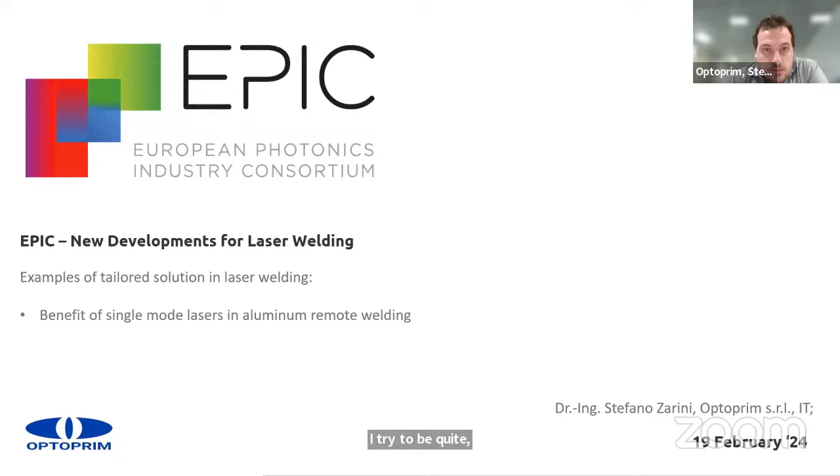First of all, a brief company presentation, who we are. And I wanted to highlight immediately what we can do for you and what you can do for us. It's a wonderful sentence that tries to identify and better explain what we can do. So I want to state this from the beginning, not at the end.

In this session, we will focus on examples of the potential benefits of high power single mode lasers in aluminum remote welding. Finally, some conclusions. So, first of all, a brief company presentation.

We prepared a nice video that tries to explain who we are and what we do. We started in 1999 as a distribution company. We quickly realized it was not sufficient to provide information related only to specific components, but we understood the importance of having knowledge related to the applications we analyze.

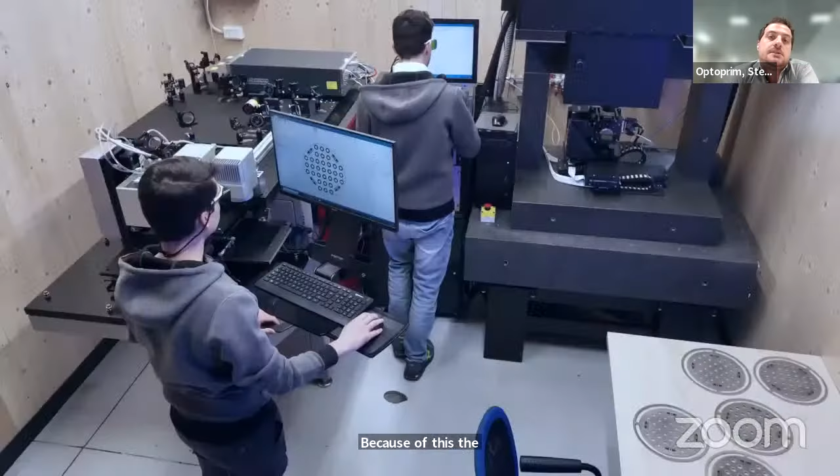Because of this, the company decided to invest strongly in technical expertise, where each application has specific engineers who can focus on it and provide a specific solution to a specific problem. This is an important step.

What we are looking at currently is our facility, which is taking the name of Optoprim Engineering. Optoprim Engineering is the division of Optoprim that takes care of the specific applications of each customer.

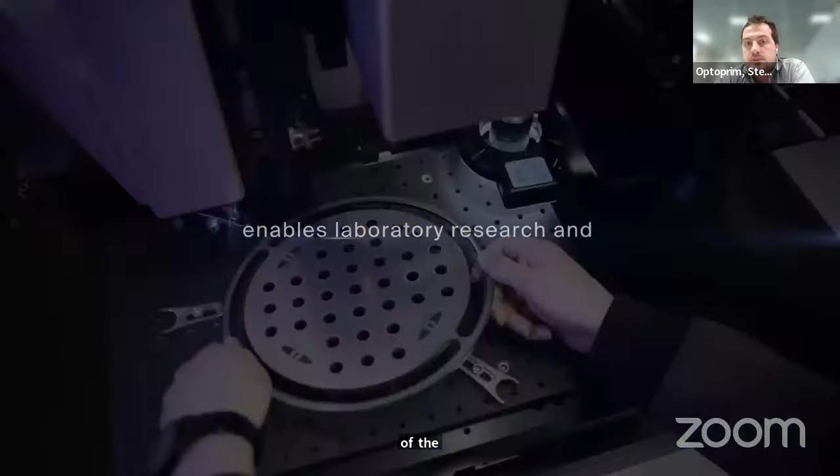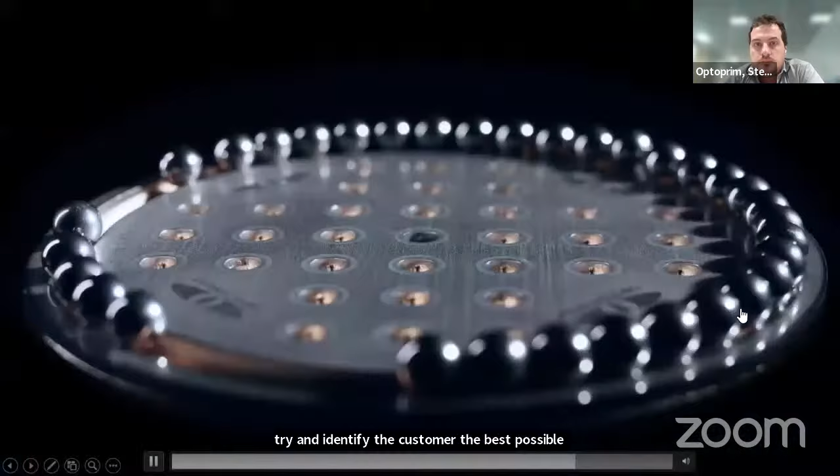Given this, the aim is to try to provide the customer the best possible solution, with the objective to compensate and realize an identification of all the process.

So, given this: what we can do for you, and what you can do for us, is please describe in detail your manufacturing problem. We are going to analyze it to understand the production environment you are located in, and we are going to provide you a possible solution for this problem.

How do we work and what do we do for you? First of all, we perform an economic sustainability assessment of the idea. We can build whatever we want, but is it really needed to have a Ferrari to go to the grocery store?

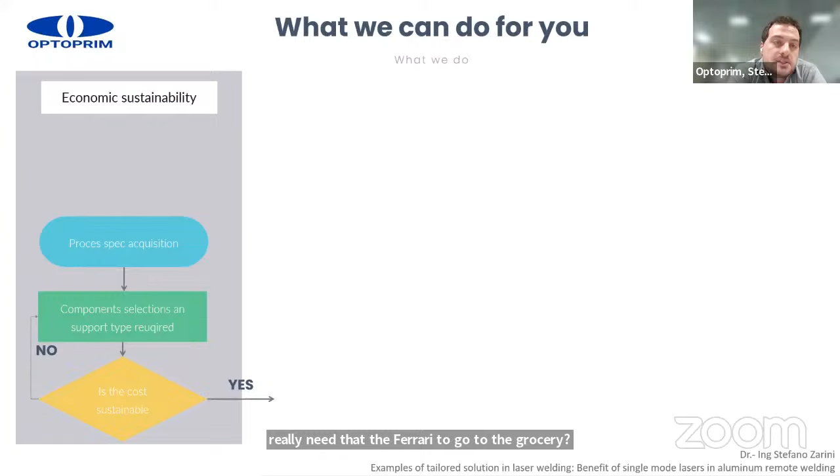This is the main question. So if you want a Ferrari to go to the grocery, please, we are happy to help you, but from time to time it is not possible. So first of all, we try to identify the economic sustainability of the solution provided, and then, once this is identified, we switch to technical feasibility.

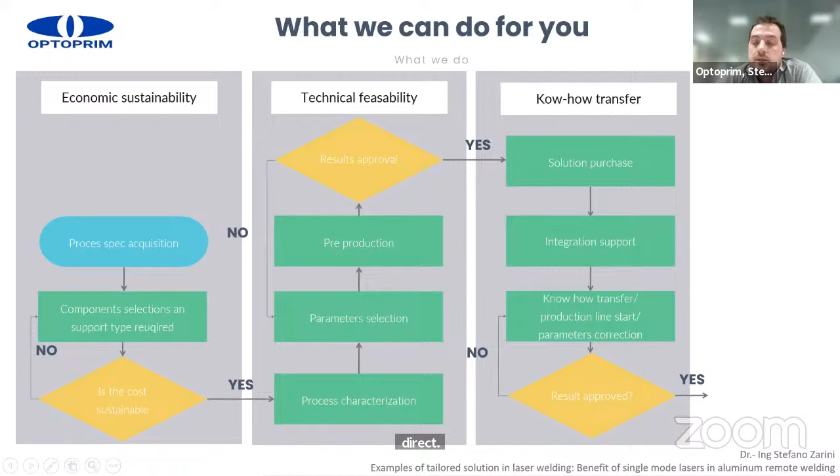So we identify and understand the process, characterize all the process, select process parameters, perform pre-production to validate in a more statistical way, and get results approval from the customer. When this is achieved, we switch to the transfer of know-how and of the solution to the machine builder or to the end customer directly. Once all this phase is done, we close the project.

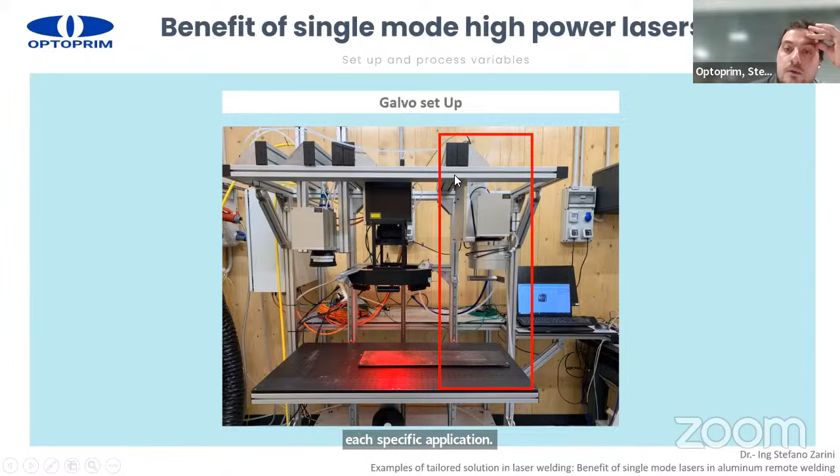We used one of our cells fully dedicated with different types of remote optics to accommodate each specific optic for each specific application. In this case, we used zoom optics that allow us to work with multiple lasers.

In this case, we compared the fixed spot solution with a maximum power of 3 kilowatts, and we will understand later why only 3 kilowatts, with an amplification factor of 2, and different types of energy distributions from the standard laser, introducing beam shaping.

We tested different types of speeds. In a similar fashion, we always used 3 kilowatt lasers, but using wobbling, so using a spot of 150 microns. What we kept constant was the overlapping between subsequent weldings, from 25%, 50%, and 75%, using wobbling amplitude and a maximum wobbling frequency of the scanner up to 300 Hz, using the same welding speeds.

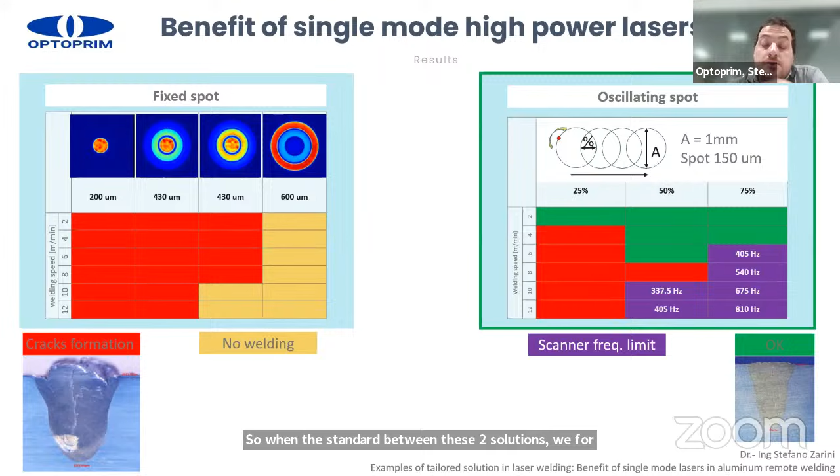If we go directly with this type of approach, independently from the energy distribution used with fixed spot deposition, in most cases we had crack formations. Because of low power density, in some cases we did not have any welding. Because of the high scanning speed, we were not able to achieve super high frequency with the scanner, so we couldn't cover this area. Finally, we were able to obtain nice, smooth, crack-free welding. So between these two solutions, for this type of application, it was better to use a wobbling approach.

Now, we were talking about single mode lasers, but up to now we didn't work with any single mode lasers. Given the identified solutions and the goal to maximize the working area for laser processes, we used this configuration: 50 micron spot, 140 millimeter collimation, and 420 millimeters focus length, obtaining a laser spot of 150 micron. The customer's request was to enlarge this working area as much as possible, so squeezing the fiber size as much as possible, moving to single mode lasers. This is why we decided to limit to 3 kilowatt, because currently most single mode lasers with the highest power can achieve up to 3 kilowatt.

We can keep the same collimation length, but enlarge the focusing distance up to 1050 millimeters or 1500 millimeters according to the fiber size, achieving the same spot size. This way, we can maximize the working area, and thus avoid using a robotic arm, working directly with a fixed scanner.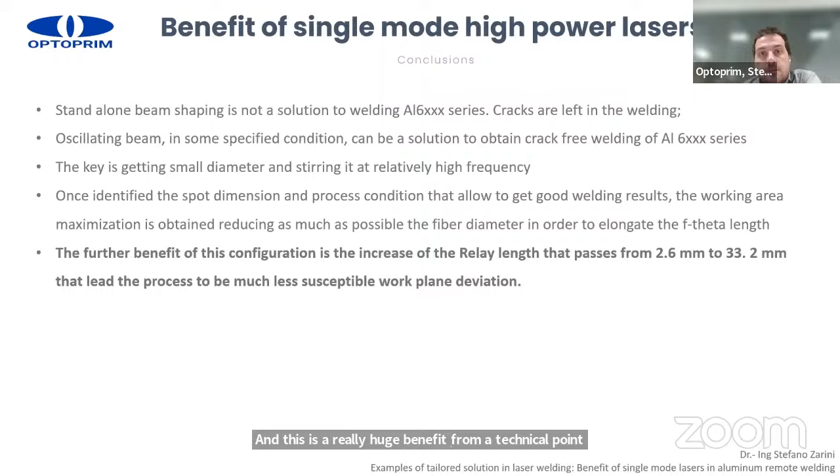In conclusion, we wanted to give an example of what we can do and how we structure the design of a solution that we provide to our customer. A standard methodology is always used: first, comprehension of the context where the customer is located and what are the real needs of the customer. Further than this, we identify the best possible solution, being quite straightforward in the example case we presented, but we could have had many more - this is our daily routine.

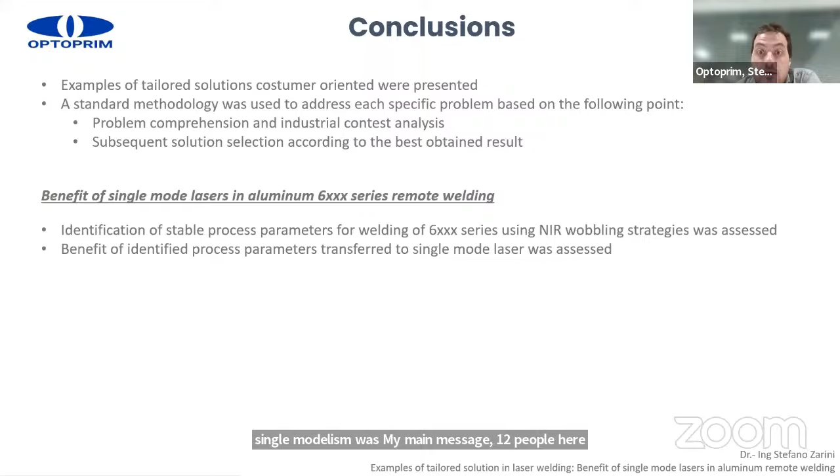An identification of stable process parameters for welding of 6000 series aluminum using a near-infrared wobbling strategy was assessed, and the benefit of transferring the identified process parameters to single mode laser was assessed as well. My main message to everyone here, including people from the optics side, is that one of the biggest challenges we face is the limitation of long-range f-theta lenses, and also the limitation of high-power single-mode lasers. We believe that in the future, big enhancements will be made in both sectors, with big benefits achieved from a manufacturing point of view.

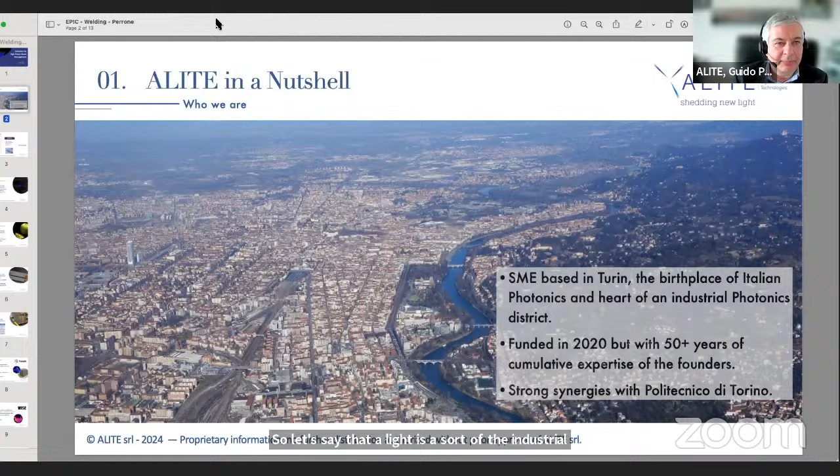Despite being a young, small company, ALITE is organized into teams, or if you want high-sounding words, divisions: one working on lasers and the other working on sensing. The one working on lasers will be discussed more in detail in the next slides. So let me say just a few words about sensing.

The team working on sensing is developing a fiber optic monitoring system, the entire monitoring system from the sensor itself, typically using fiber Bragg gratings, to the entire interrogation system. But the real keyword that brings together these two teams is personalization.

We have heard before about large companies providing off-the-shelf solutions, really excellent off-the-shelf solutions. In our case, we try to find our niche in customized solutions - solutions that cannot be found directly on the market for special applications.

So, for example, the laser division is working on providing customized, tailor-made laser sources and beam management devices for processing challenging materials like paper, cardboard, and most important for current applications, so-called high reflective materials such as copper, gold, and some kinds of polymers.

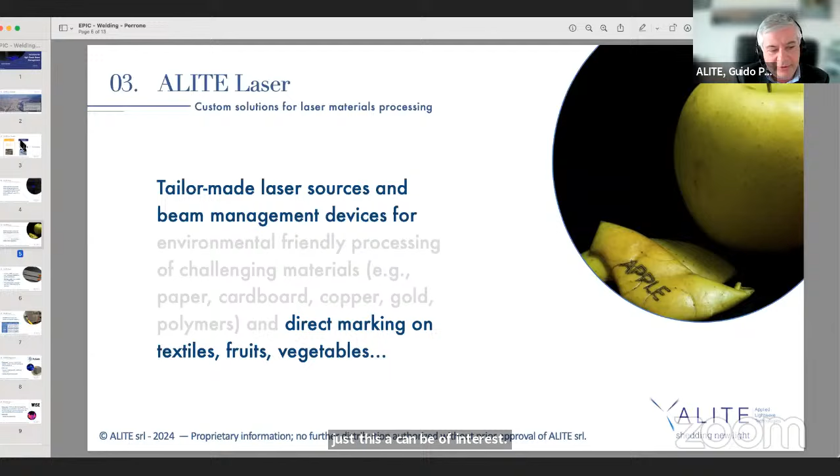Not only that, but also some direct marking applications, like in textile, fruits, vegetables. You see in the picture that we wrote apple on an apple. This can be of interest, not for welding, but to reduce labels and therefore environmental impact.

In practice, what can we do? Well, we can provide customized laser sources. What does that mean? It means, for example, sources emitting in the near infrared with some peculiar feature not easy to find on the market.

For example, a customer recently asked us to develop a laser diode emitting at a certain wavelength, and we took commercial diodes - we are not fabricating semiconductors, but working with optics - introducing wavelength stabilization either through external discrete components, and we are also now pioneering stabilization through gratings inscribed directly into the multimode delivery fiber. We managed to obtain the required wavelength.

We are developing blue laser systems, and we will see why blue is interesting later on, and also other non-conventional wavelength lasers, like for example, recently a customer asked us to develop a 100-watt fiber laser in the L band, so above 1600 nanometers.

We also develop devices to couple, switch, and combine high power beams in the kilowatt range. This is of interest for welding applications, because often we have to change the diameter of the beam delivery fiber, the process fiber, which can be done by switching between different kinds of fibers. Or we could be interested in combining different beams to scale the power or introduce specific features. We heard about single mode lasers being limited to certain power, which is true. A possible approach could be to combine single mode lasers at slightly different wavelengths in spectral division multiplexing to scale the power.

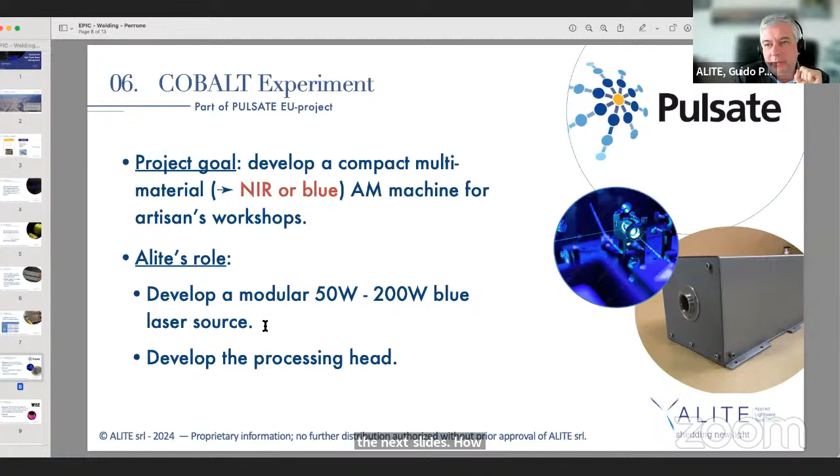The role of ALITE in this project is to both develop the source and develop the processing head. We will see in the next slides how these results can be adapted also for more specific welding applications.

The other project we are involved in is called WISE. It's a project that just started recently, and the goal is to develop an all-in-one machine that integrates up to 5 laser processes for the direct fabrication of macro-scale products. Integrating 5 laser processes means that using a single machine, we have to combine possibly 5 types of lasers together, having different wavelengths. Again, we go to the idea of combining lasers emitting in the infrared and lasers emitting in the visible, green, blue.

But also lasers operating at different operating regimes, for example CW for additive manufacturing or for welding, and pulsed for polishing the surface, for smoothing, or for subtracting. This means the project requires the development of specific optics, hybrid combiners, to combine all these kinds of lasers together. ALITE's role is in developing the optical chain, the entire optical setup from the source to the workpiece.

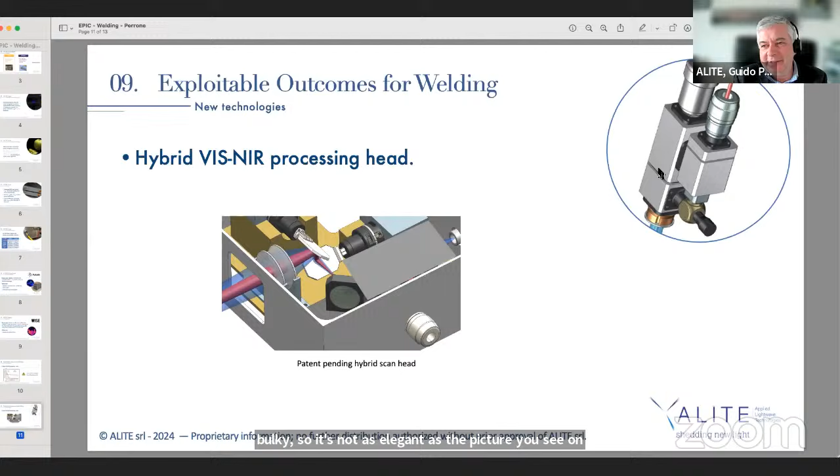Another outcome that we expect from our experience that can be used for welding is a derivation of the approach that I was mentioning before for the WISE project, in which we have to combine several types of lasers.

So the idea is, for example, that we have to combine together a visible or near infrared, or both of them, using the previously mentioned approach, CW beam, in the order of hundreds of watts if you are thinking of blue, and probably kilowatts if you are thinking of the infrared, together with a pulsed laser. Pulsed laser that can be in the order of nano to picosecond usually, or at least the kind of application we were targeting was in this range.

At the moment, we have developed a prototype of a combiner that can take as an input a fiber with a standard QBH connector coming from the CW laser, while the pulsed laser is delivered in free space.

But in the future, we plan to have an all-fiber solution that could be, for example, using hollow core fibers to better deliver the pulsed laser.

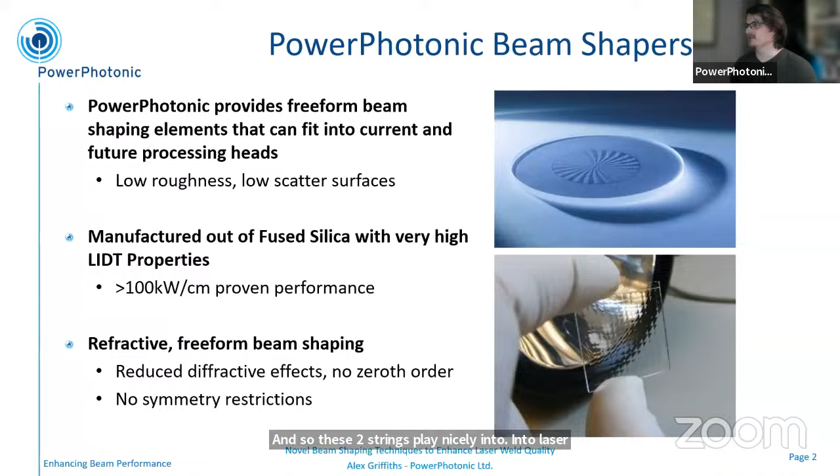The problem that we've addressed in this work is the welding of aluminium 6082. As has been mentioned, welding some of these aluminium alloys is difficult. The current techniques use filler wire, adding extra material into the process — it's quite complicated and can be quite wasteful. And 6082 is quite sensitive to cracking along the weld line. So in this work, we're aiming to add some benefit through beam shaping to get a laser-weld-only process with no filler wire, and show improvement in the issues around cracking.

So there's two different beam shapes that we're looking at here in this work. The first of them is based on our light tunnel generator optic.

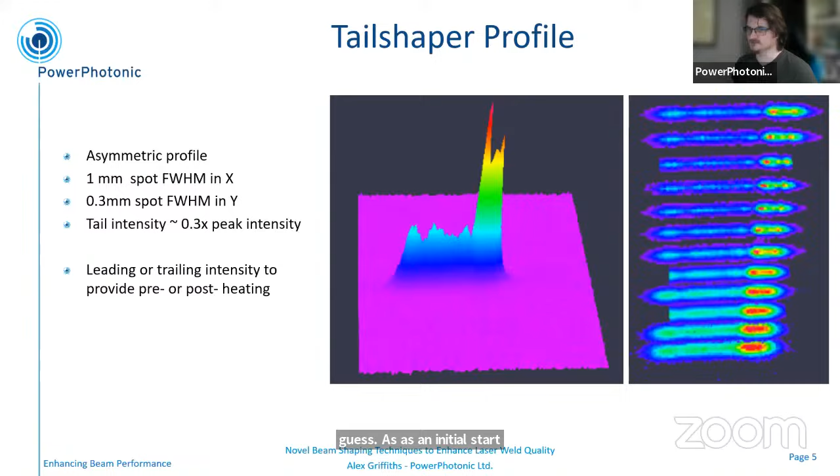There might be air bubbles getting trapped in there. And the ejected material is spatter - it's going to end up where you don't want it.

So if we move on to the LTG results, on the left this is the 900 micron version. First thing to note is that the weld is obviously wider because you've increased the size of the weld pool by distributing more power around it. But it's also a little bit more stable - there's less motion in there, and less material coming out.

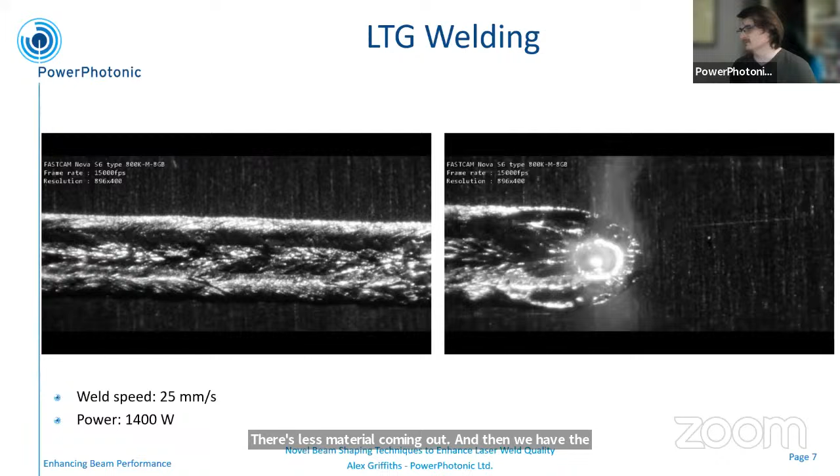And then we have the same again for the 1200 micron case. Again, larger melt pool, and still appears difficult to see when you just quickly flash these up, but it does appear a little bit more stable as you increase the diameter of the ring you're using for the welding.

Onto the tail shaper. Now we've got the two different cases with the same beam shaper - tail forward for preheating and tail behind for post-heating. Immediately this is visually much better. There's a lot more stability, not so much motion going on behind the weld, and no material being ejected as far as I can see from the video. It's very smooth looking, and the whole structure forming after the weld is quite different.

And then the same thing again with the tail behind. Now we're affecting the cooling end of the weld. Again, very smooth, no ejection, and a completely different profile as it's cooling down.

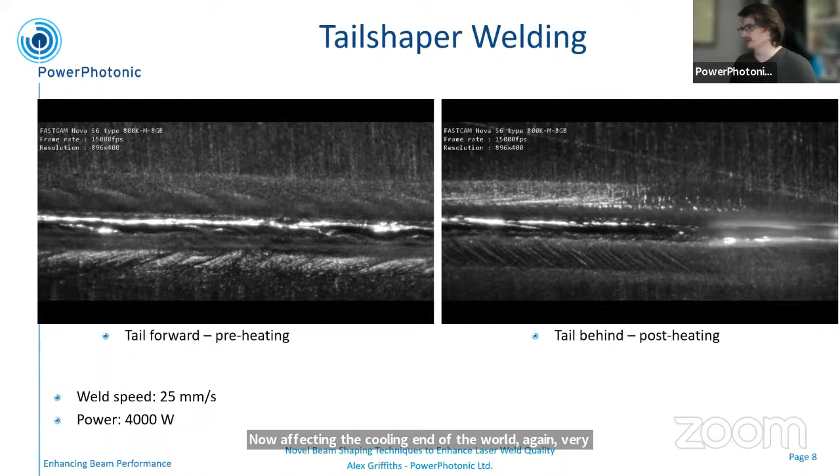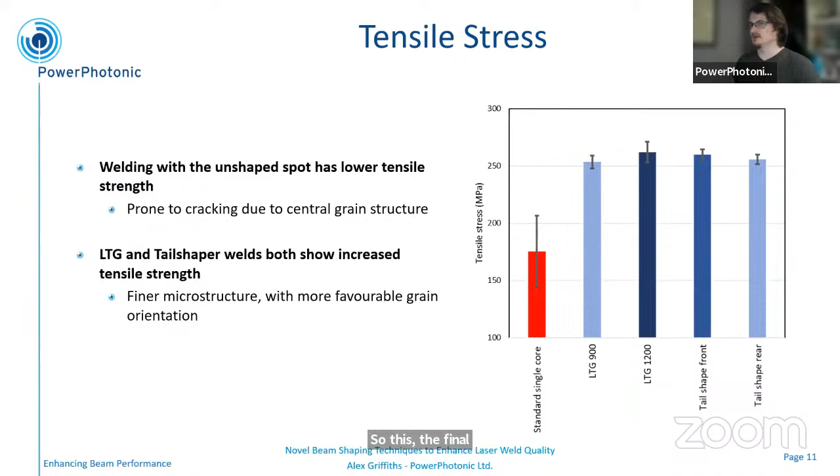In conclusion, we have shown that tailoring the beam shape provides stronger welds, and that this leading, trailing, or annular intensity profile for pre or post thermal treatment stabilizes the melt pool and improves the weld strength. This significantly affects the weld morphology, grain sizes, shapes, and orientations are changed, and we've achieved approximately 45% increase in the weld strength. This is only a starting point.

We've really just shown that the beam shaping gives you an improvement. The next stages will be to find out exactly what beam shape gives you the best result. There might be quite some room to optimize this based on what size of spot you make, how long a tail, what intensity ratios do you use. There's a whole design of experiment to do around this.

So to answer the question, what can we do for you? We provide process enhancement through beam shaping. It's a straightforward modification to existing equipment, no need for a full redesign. We can tailor intensity profiles to the process's requirements, and within reason, we can do arbitrary output profile shapes.

And what you can do for us, well, we're looking for what challenges are seen in welding where adjusting the thermal profile will help. We can adjust the intensity profile to match that. We're always looking for partners to work with us to run trials, to find an optimization, to generate the best possible profile and take this to a commercial application. Thank you for your attention.